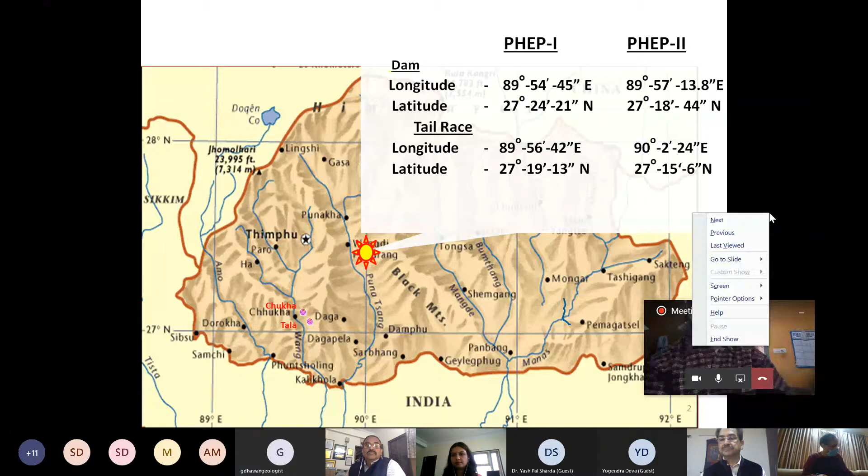So the title of the presentation is Punatsangchhu-I.

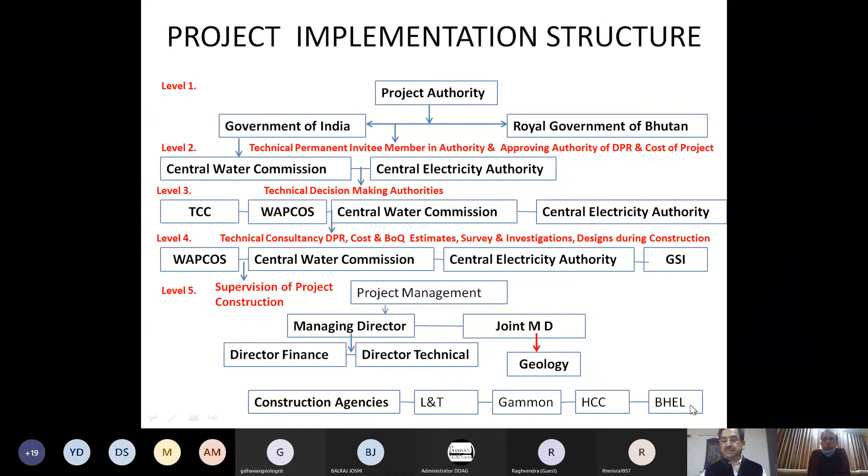The geology wing of the project used to be governed by the joint managing director, whereas the managing director had director of finance and director technical, who used to hail from Government of India, serving officers from Government of India. The technical works got carried out through various very efficient and renowned teams of constructing agencies, like L&T is given the work of dam, Gammon making HRT, HCC is making powerhouse, and BHEL is overall supplier of and installations for the machinery of hydromechanical and hydroelectrical works.

Now let us go through the history of the project. The original dam location for the Punatsangchhu-I dam was at 1.5 kilometer downstream of the present dam site. The location of the dam axis was shifted in 2008 by 1.5 kilometer upstream, with an understanding that the dam foundation grade will be available under the riverbed at a depth of around 45 meter, as compared to what it was expected at 78 meter depth at its original location. So it was a great advantage being seen, and it was understood that with this gain in lesser depth of the excavation for the foundations, the dam axis should be shifted 1.5 kilometer upstream.

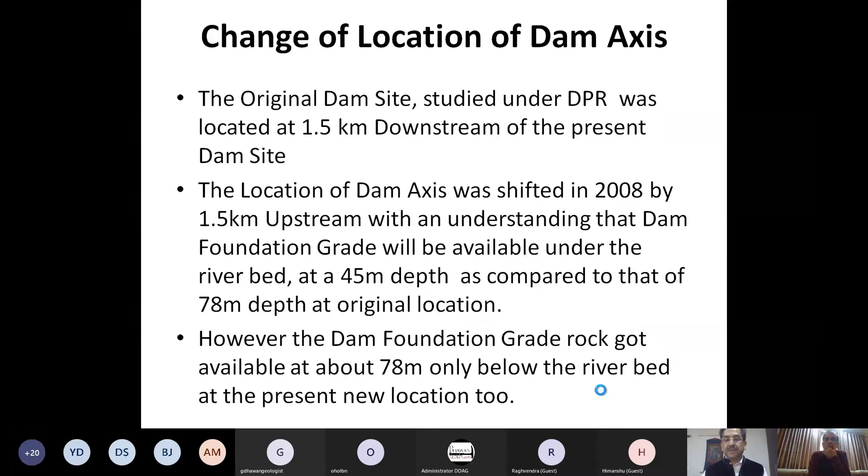However, later, during the construction of the project, and a little earlier also, when tenders were being drawn, it was seen that the dam foundation grade rock still existed at around 78 meter below the riverbed. So that advantage was not there as was seen. However, it was seen that there will be an advantage of at least gaining the head for generation of power, and by that some 105 megawatt extra could be generated at a very little cost added to the project. Therefore, it was decided by the authority, with input from all the consultants, that the dam axis can be shifted 1.5 kilometer upstream.

Then if we see the Google map on which I have tried to transfer the project salient features, this is river Punatsangchhu with a light blue or white color, and the red color is a primary national highway which runs parallel to the river. The river has its left hillside, which comprises of a very good geology, and it has its right bank, which is relatively very weak geology.

Dam is located here, and HRT goes within the left hill because it is a very good geological formation, and the powerhouse is there. There is around 300 meters, or 290-meter, drop of the pressure shafts, and power is generated, and the water is let through the tail race tunnel to join back in the river.

Punatsangchhu-I and Punatsangchhu-II. Punatsangchhu-II is around 13 kilometers downstream from this point, and it has totally a mirror image of this project, but with the only difference that the hillside on the left bank here is of very good geology. Therefore, all the underground structures are housed within the left bank. Whereas when the river reaches Punatsangchhu-II, the situation just gets opposite, and the right bank hill there has a very good geology, and left bank geology becomes very poor. Therefore, all these underground structures are housed in the right bank there in Punatsangchhu-II.

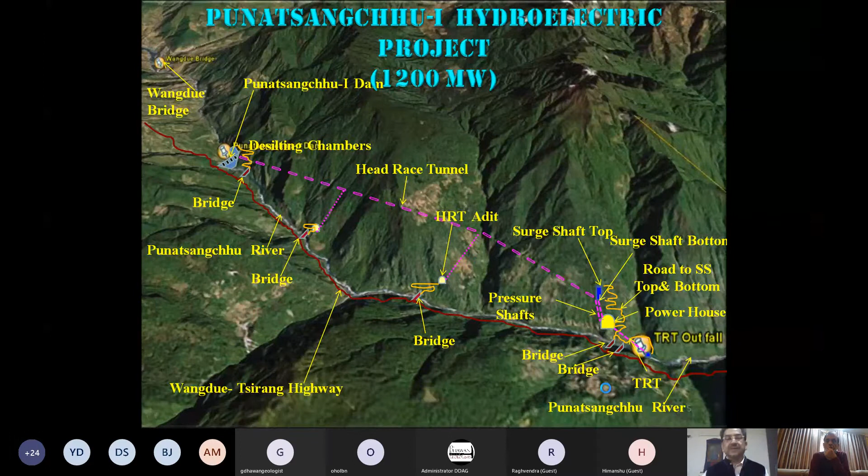So let us concentrate on Punatsangchhu-I, which has a very good geology in left bank. Therefore, all underground structures are there in the left bank, and right bank has poorer geology. The type of the dam conceived was concrete, which later on was considered to be made RCC, roller compacted concrete gravity dam, for some reason which I'll explain later.

The top of the dam is at 1205 meter elevation, FRL being 1202. Length of the dam top is 239, and maximum height of the dam is 136 meter from the foundations. The dam's present level of excavation has reached 1110 meter, and the deepest elevation for the dam section is 1069 meter. Therefore, for the deepest section, around 41 meter excavation was yet to go.

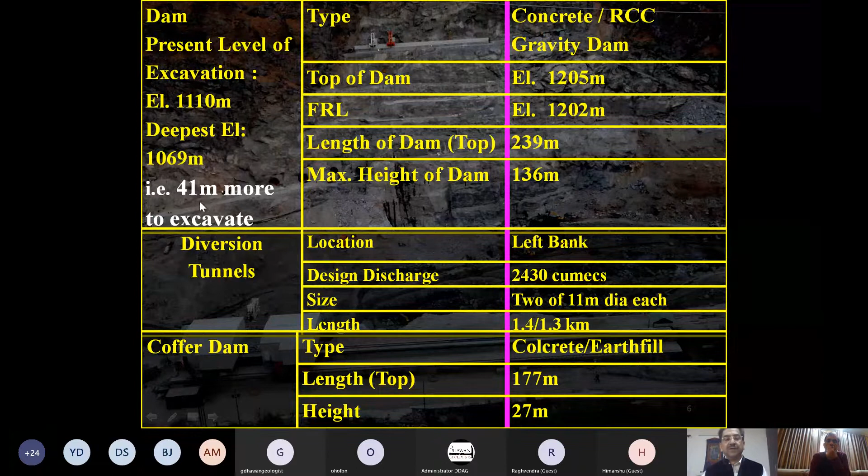This is the dam pit view from the downstream. This is right bank, and this is left bank. If we see the left bank, as I said, it was a very good geology. It has its rock almost vertical face, and very good looking, very sturdy. Whereas the right bank is very flat as compared to left bank. And later on in further slides, we'll see that the geology here is not very good, as could be apparently seen also. This is the National Primary Highway.

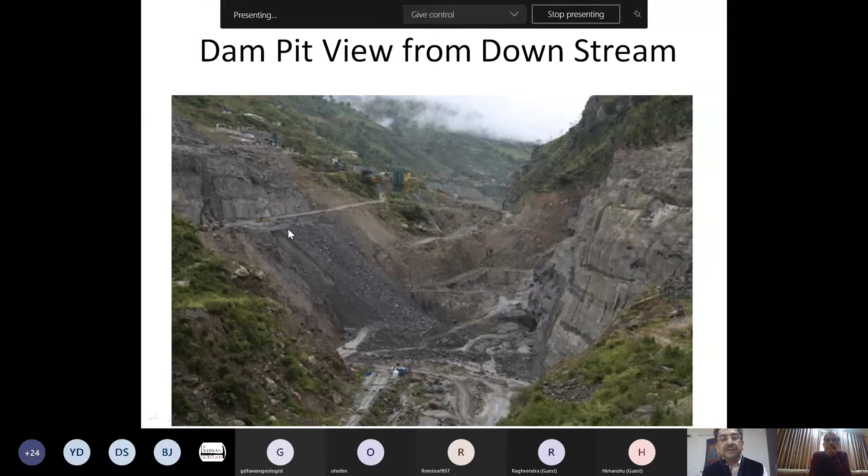This is the left bank, and we can see there is excellent subvertical rock face encountered in the left bank. We had some vertical joints persisting in this face. Therefore, you will see a lot of cable anchors periodically given at various benches, designed to be 30 meters in length each, and of capacity 30 tons each.

These are intake structures, intake tunnels ready to be further given an intake structure rising from here. The intake structure started here, and by now it has come up very well. This photograph, being old, is meant only to show the geological setup of the left bank. This is the dam axis I have marked on the left bank, and the dam imprint can be seen here.

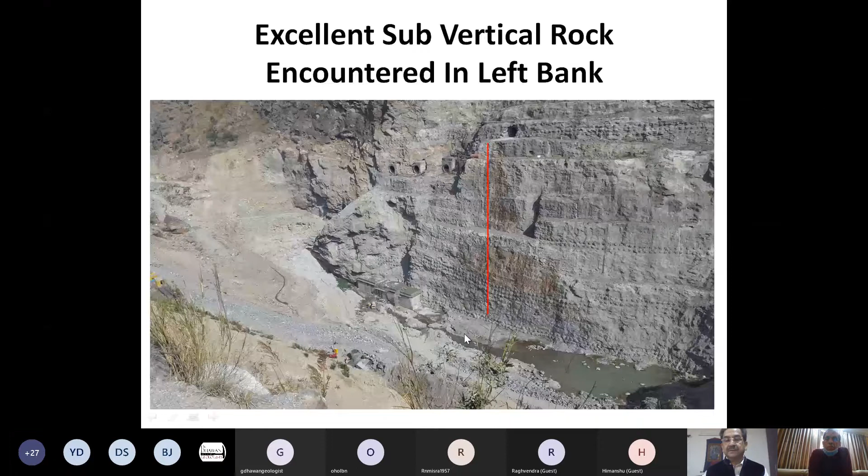This is the right bank, which is relatively very flat as compared to the left bank, and geology can be appreciated in this picture. The highway is here. This is the top of the dam to be here. This is 1205 meters, and this is around 1220 meters, which later on sank and became 1216 meters or so. These are the cable car benches from where the cable cars are suspended for concreting of the dam.

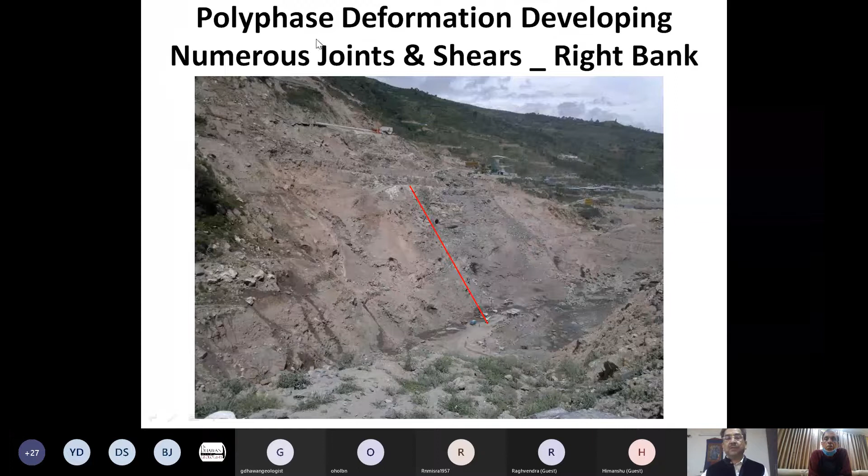The right bank can be seen, and it is comprising polyphase deformation which has developed numerous joints and shears in the right bank.

There is a strange coincidence which happened in the two mega hydroelectric projects, Punatsangchhu-I and Punatsangchhu-II, which are under construction since 2009-10 in Bhutan.

The coincidence is that in Punatsangchhu-I, the right bank at the dam site has failed, moving and sinking the hill mass by 5 meters over a stretch of 400 meters in height and around 250 meters in length. Whereas in Punatsangchhu-II, there was a huge rockfall in the downstream surge cavern, resulting in a 91 meter high, 45 meter wide, and 70 meter long cavity being formed in the crown of the downstream surge gallery.

So, to appreciate things better, let us understand the timeline of making Punatsangchhu-I, marking some crucial events along the time. In 2008, the dam axis was shifted 1.5 kilometers upstream from the DPR studied dam axis location.

In 2009, the tender stage investigations were done with boreholes and a drift done in the right bank, and tender stage designs and drawings were prepared. Also in 2009, the work was awarded, with L&T for the dam, HRT by Gammon, and Powerhouse by SCC. It also happened that in 2009, around April, there was a big storm, Aila, affecting the Bay of Bengal, which also affected Bhutan.

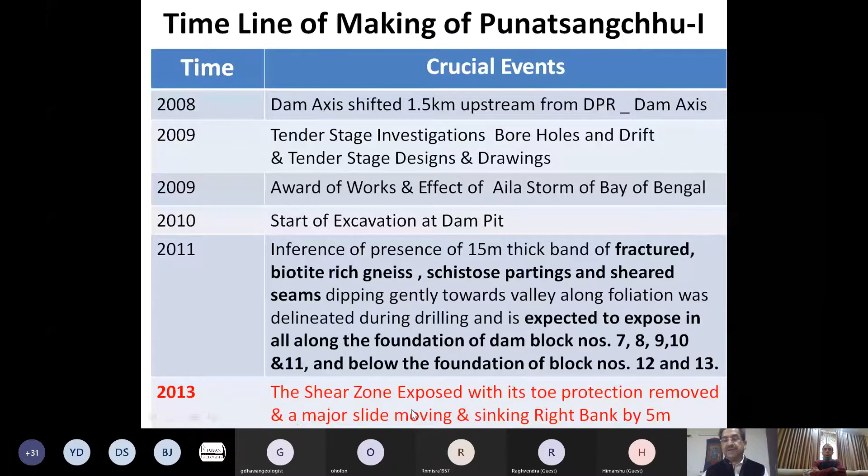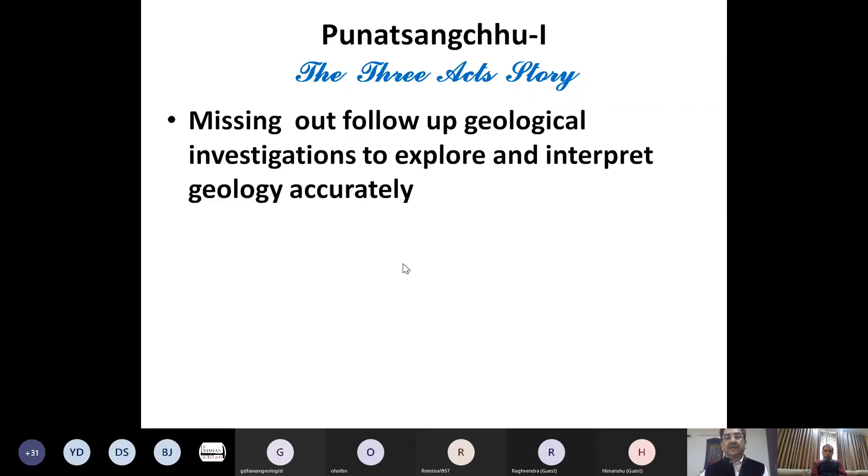I like to put the Punatsangchhu-I history in 3 acts of its story. First is about missing out follow-up geological investigations to explore and interpret geology accurately. In 2009, at the tender stage, various geological explorations were done and some geological inferences were drawn. Later on in 2011, when it was seen that a 15-meter thick band of fractured rock and shear seams are present there, therefore some follow-up investigations were required, which seems to be missing. As a consequence, because the shear zone could not be interpreted, the designs for the support of the excavated slopes also could not be revised, and therefore this also may be a missing out.

The corrections to be made to the designs was there. And as a third act, it resulted into the catastrophic impact during the excavation of Punatsangchhu Dam, in which the right bank had moved in a stretch of 400 meters in height and around 250 meters in length along the bank, which moved by 5 meters vertical, 5 meters towards the river, and around 2.5 meters along the river.

If we concentrate on the geology in the right bank, it consists of gentle natural slopes on the right bank of river and they are controlled by low and valley-ward dipping foliation planes. These prominent joints are closely spaced and are frequent and open at places and form potential wedges due to their intersection.

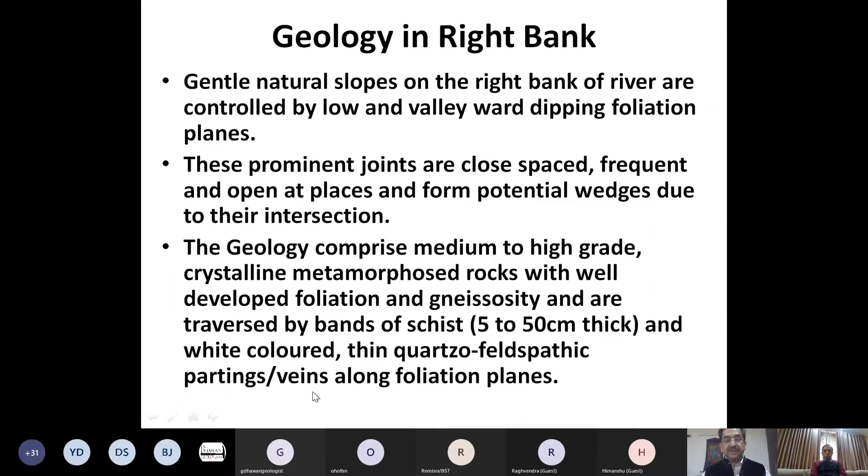The geology comprises medium to high-grade crystalline metamorphosed rocks with well-developed foliation and gneissosity, and are traversed by bands of schist which are 5 to 50 centimeter thick and are white-colored thin quartzo-feldspathic partings veins along the foliation planes. The strata shows small-scale S-shaped tight folds and broad warping of the beds at places, indicating that rock...

...strata has undergone polyphase deformation in the past, leading to the development of numerous crisscross structural discontinuities like joints, shears, etc. of different orders.

Five prominent and two random joint sets are recorded in the right bank. The foliation is very close to moderately spaced, from 2 cm to 60 cm, and dips towards the valley slightly in downstream direction. However, rolling of dip is also observed at places.

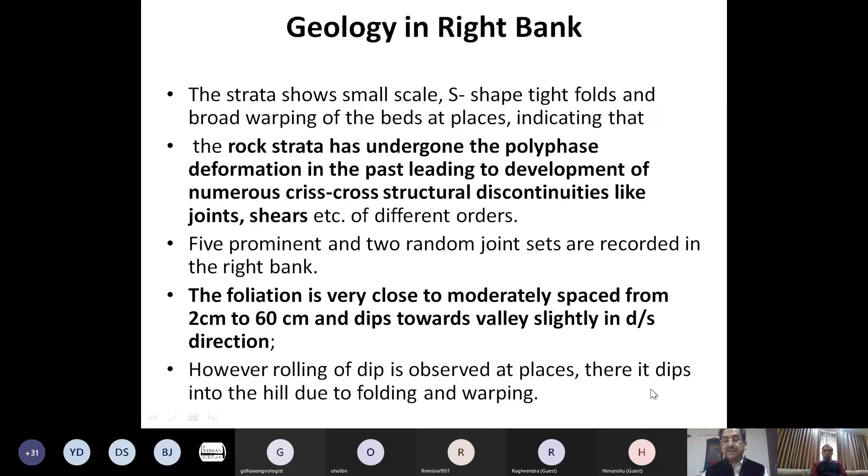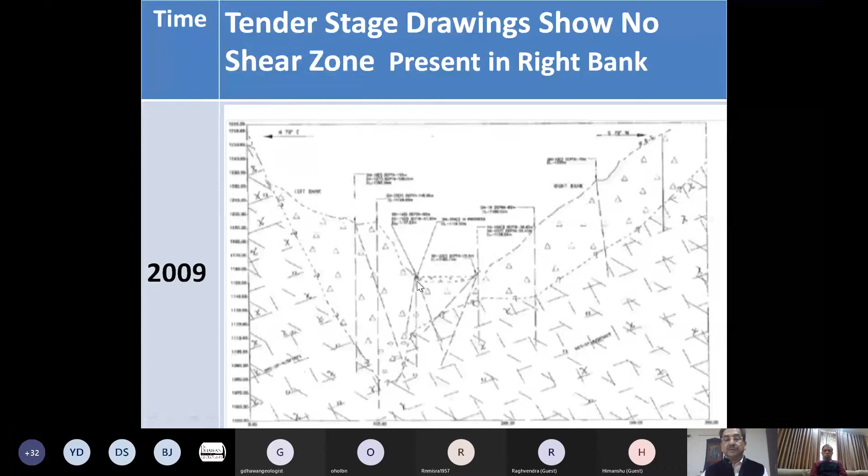There it dips into the hill due to folding and warping. In 2009, in the tender stage investigations, these geological drawings prepared do not show any presence of shear zone in the right bank.

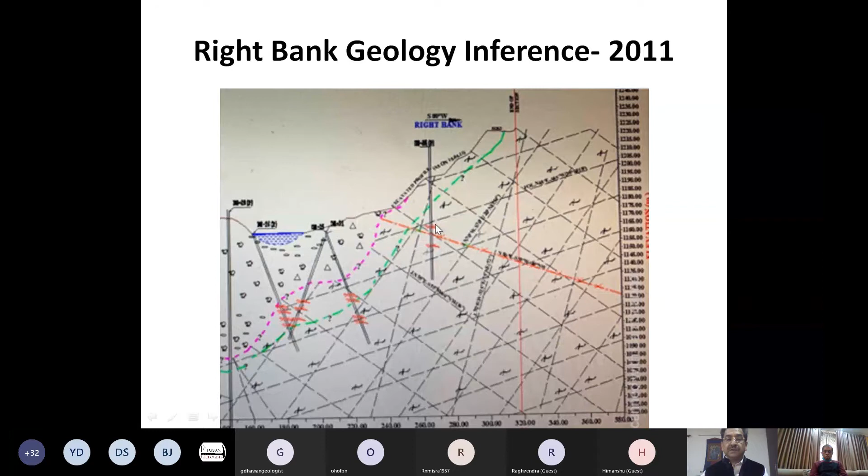Whereas later on, from the same geological investigations and borehole logs, in 2011, the project geologist had interpreted that there are shear seams present, and there is a band of around 15-meter thick band of fractured rock mass and shear seams present there.

This was perhaps the time when more explorations should have been there.

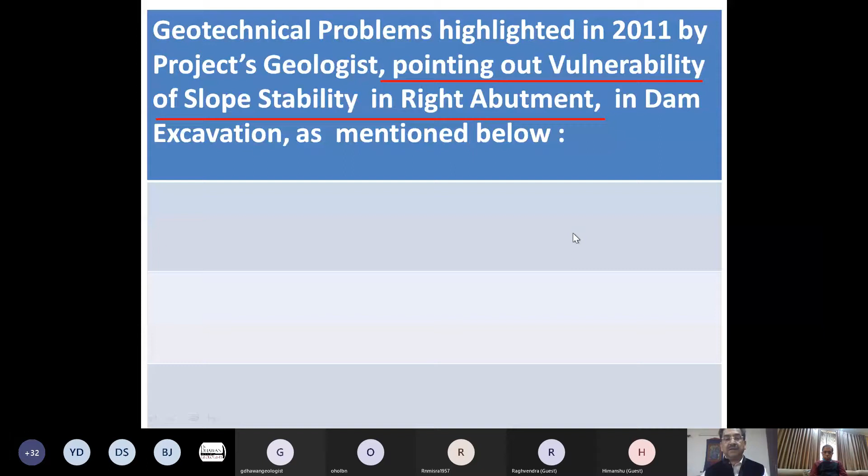In 2011, the geotechnical problems highlighted by the project geologist in the right abutment were mentioned as presence of thick shear/fracture zones, biotite-rich bands of gneiss, schist, with having very low strength and fissile and fractured, and have a very less RQD. They are moderately jointed and have a very blocky nature of the rock mass with steep joints having longer continuity and persistence striking along the flow direction.

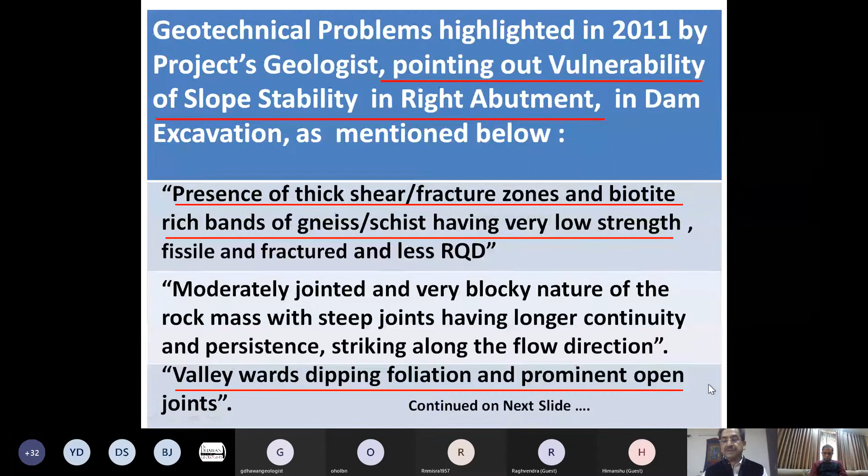Valley-wards dipping of foliation and prominent open joints. These are some highlights of the right bank's geology.

Now here, genesis of the problem had been identified, and going by the geological conditions, warning was given by the project geologist in 2011, which stated that a 15-meter thick band of fractured biotite-rich gneiss with schistose partings and...

...sheared seams, which dips gently towards the valley along foliation, was delineated during drilling, and it is expected to expose all along the foundations of dam blocks 7, 8, 9, 10, 11 and below the foundation of blocks number 12 and 13. The core recovery and RQD in the rock mass is very poor.

This is what he had interpreted. Such bands striking parallel to the flow and dipping towards valley are prone to slide under forces, hence require proper treatment during excavation.

These are the important advices that the geologist gave, that because of such bands striking parallel to the flow and dipping towards the valley, they are prone to slide and require proper treatment during excavation.

If we try to put this interpretation on the section of the dam location, these are blocks starting from 1 on the left side and going to 13 on the right side.

And if we see, he said there is a 15-meter thick band which will go around under blocks 7, 8, 9, 10, 11, 12, 13. That means this is 7. So here, something he had interpreted of a 15-meter thick band, which may be visualized like this.

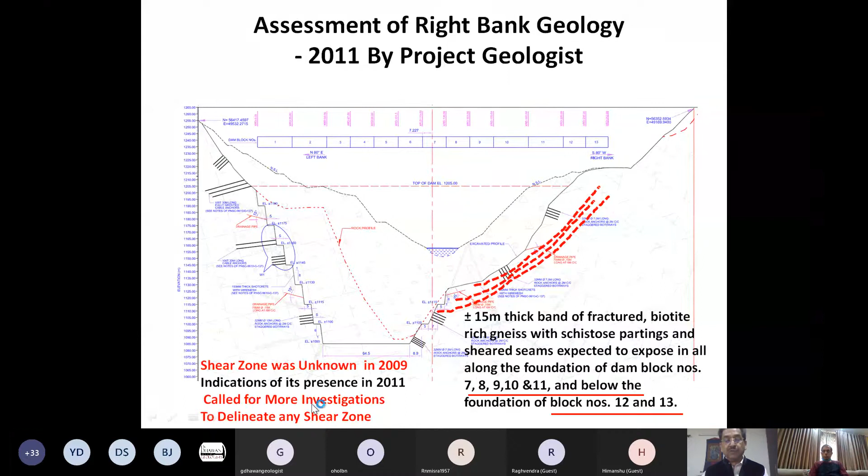This is only a visualization, but somehow the shear zone was not known, which was unknown in 2009. There have been indications of its presence given in 2011 by the project geologist. So it may have called for more investigations to delineate any shear zone if it was present.

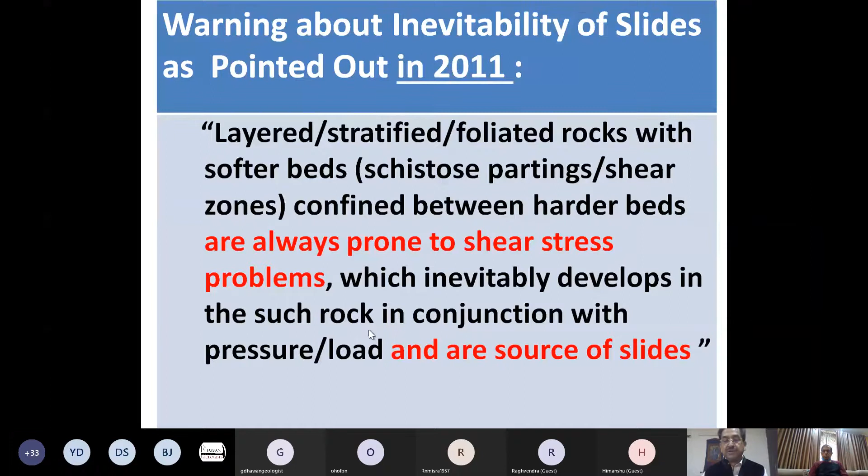Inevitability of slides had been warned in 2011, stating that layered stratified foliated rocks with softer beds, schistose partings, shear zones confined between harder beds are always prone to shear stress problems, which are inevitably developing such rock in conjunction with pressure loads and are a source of slides.

Now let us see how the excavation had proceeded in the right bank. I am concentrating only on the right bank because the problem had occurred in the right bank.

There was a national primary highway here, present with this much width shown by the red line, which was thought to be increased in width because later on most of the project vehicles would be running around this. So the width of the highway was increased and some excavation was done here in February 2010.

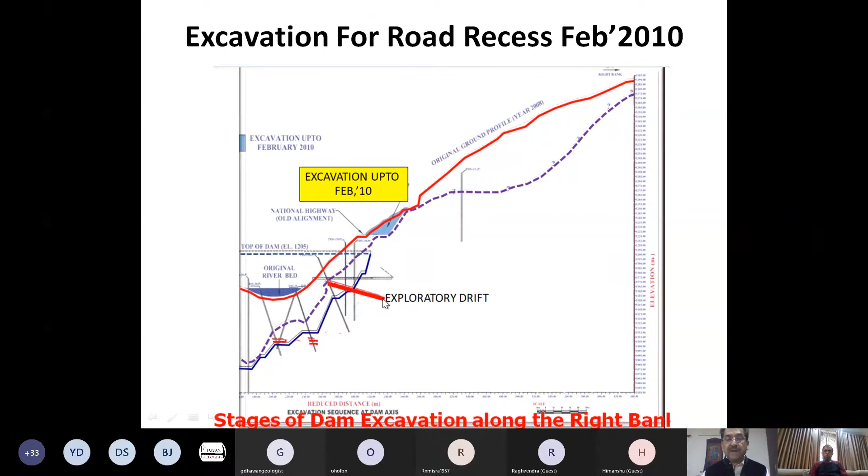This is the natural rock ground profile before any excavation, and this was the expected rock line interpreted by the geological studies. A drift was made here, around 90 meters long, and at the end of this drift there had been a collapse at that time, so the work had stopped from putting it further.

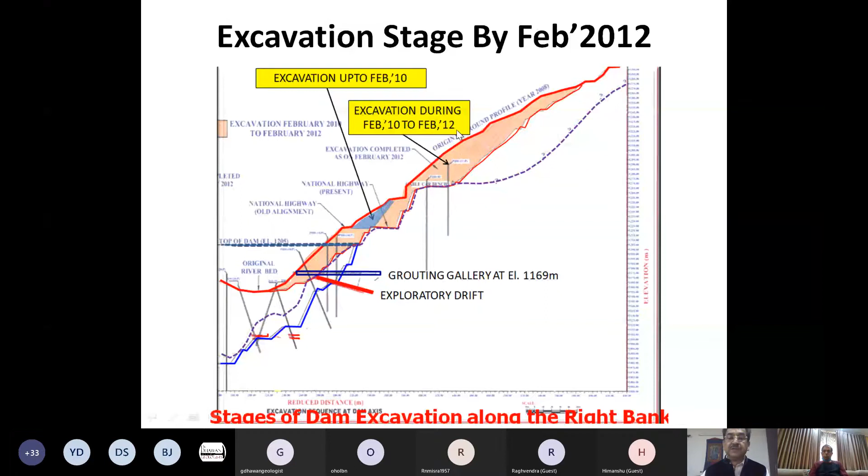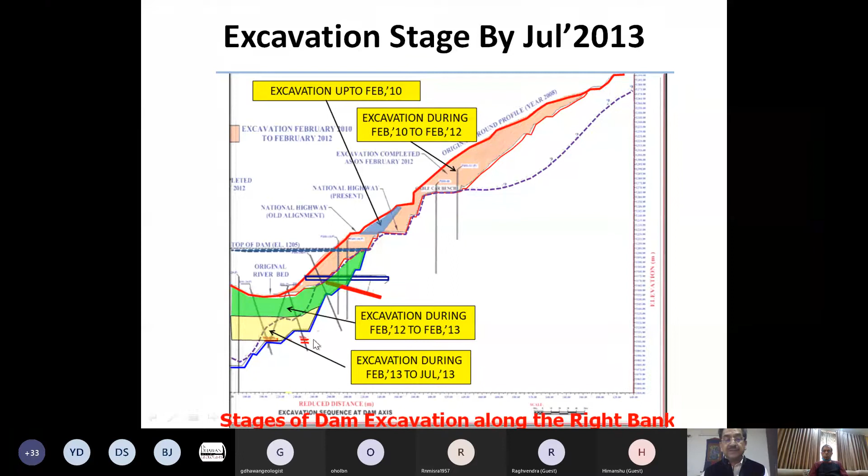Proceeding with further excavation from February 2010 to February 2012, this part of the excavation was done, and from February 2012 to February 2013 further excavation progressed and deepened. From February 2013 to July 2013, this part of the riverbed was excavated, whereby these shear zones got exposed, and the toe which was holding these shear zones got removed because of this excavation. Toe protection of the shear zone was removed in July 2013 and the problem occurred.

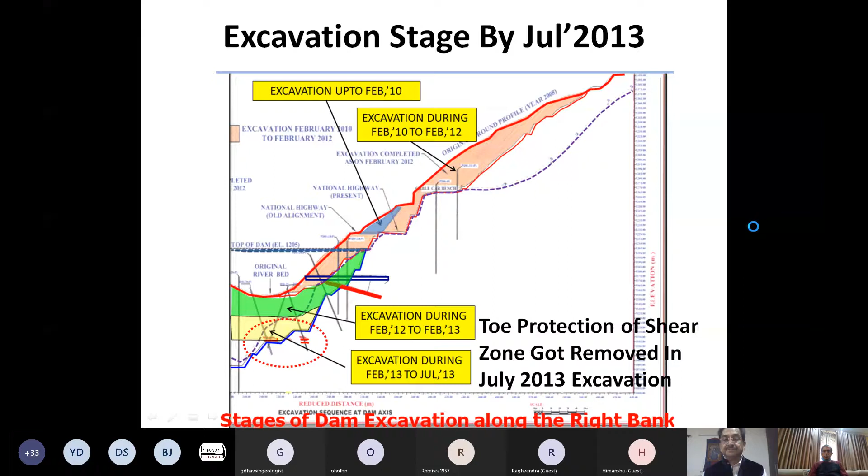It needs to be highlighted that the left bank had been given 30-meter long cable anchors, as I told, to protect it from toppling against vertical joints. Whereas because the right bank was very flat, it was not envisaged that it would require any cable anchors, and these were provided with only 7.5-meter long rock anchors, which were not penetrating long enough to reach sound rock here and protect against any slides potential along this 15-meter thick band.

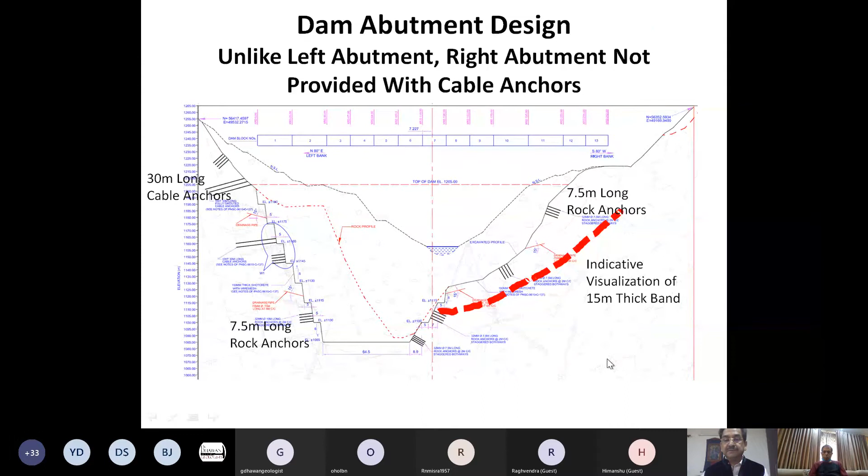So we see that the support system provided for the excavated right bank slope dam pit comprised only 7.5-meter long rock anchors, and was perhaps not sufficient for holding rock mass from sliding over the underlying shear zone. This is the delineated shear zone. I'll come to let you know how it got delineated.

Unless very long cable anchors were provided, these 7.5-meter long rock anchors are understood to be not quite safe enough to prevent any slides on the vulnerable rock mass. This is the vulnerable rock mass, which may have a tendency of sliding on this plane.

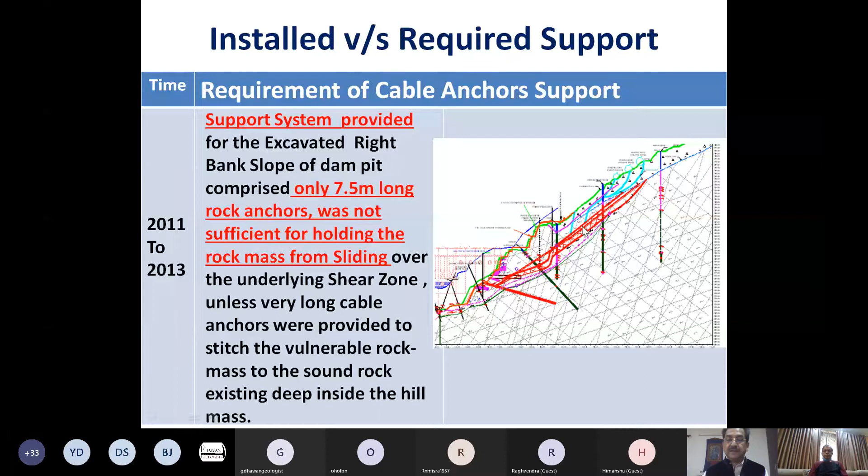Eventually in July 2013, within a week, this entire hill mass, around 400 meters in height, along the river in a length of around 250 meters, this whole hill mass bodily moved 5 meters vertically down. This highway, which was here, came down by 5 meters to this green line, and the whole right bank got shifted by 5 meters towards the river.

This shifting is by 5 meters towards the river. The red line is the earlier profile, the green one is the ground profile after the movement. So it moved 5 meters towards the river, sank 5 meters vertically, and moved along the river by 2.5 meters. All these movements were recorded by inclinometers also. The hill mass in this reach, 400 meters height, 250 meters length, moved 5 meters towards the valley, 2.5 meters towards the downstream side, and settled by 5 meters.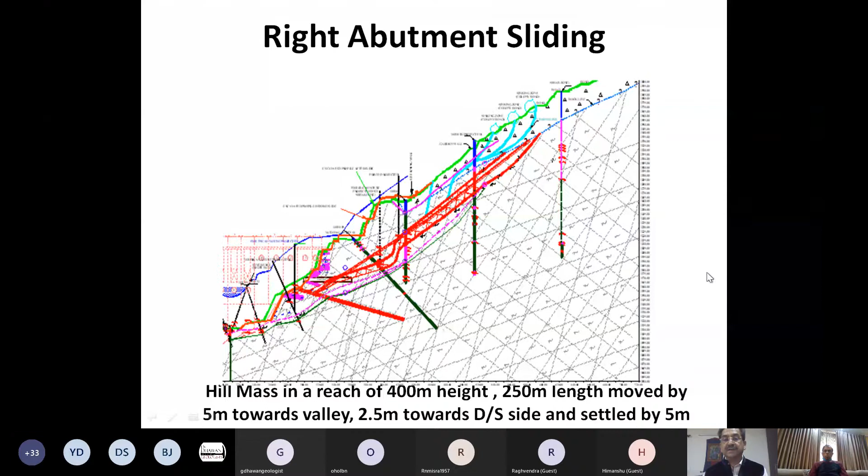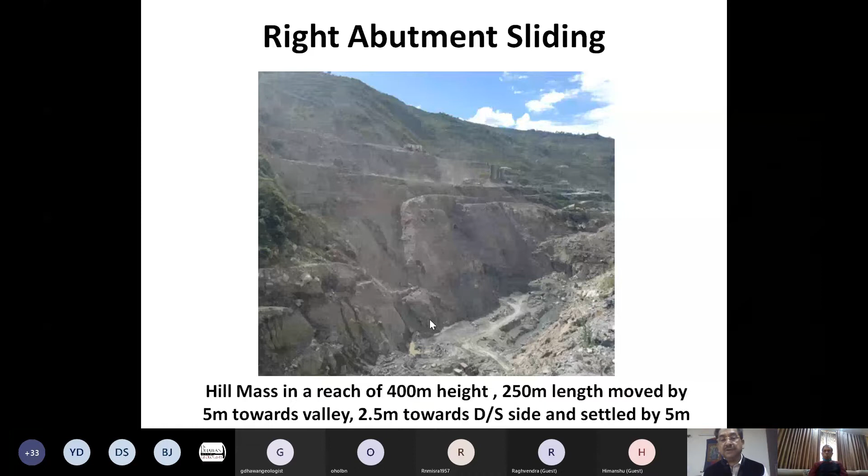Just to appreciate, these are the pictures. This entire hill mass, right from top to bottom, had shifted by 5 meters. This is a view seen from the downstream, showing the hill mass which got affected.

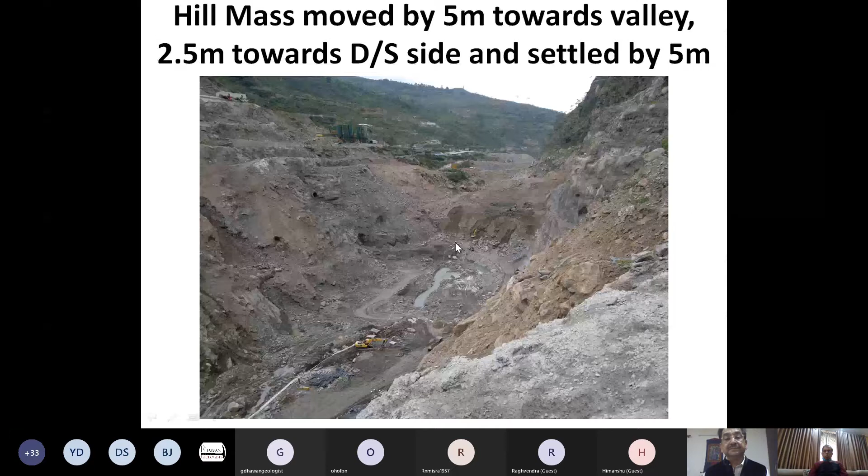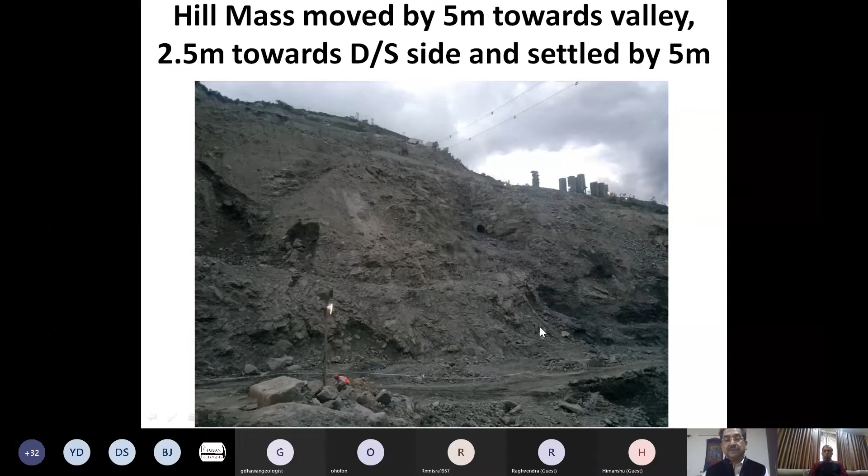This is a closer view, and the effect of the movement can be seen, how the geology got changed. Foliation and gneissosity traversed by bands of schist is visible here in these close-up views.

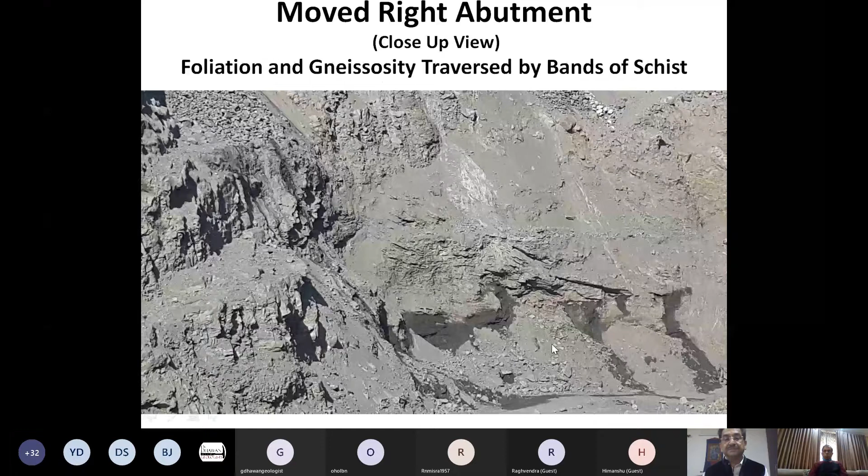The cable cars, which were earlier hanging here clear of any restriction, got sunk by 5 meters and were touching this hillside. They were rendered useless.

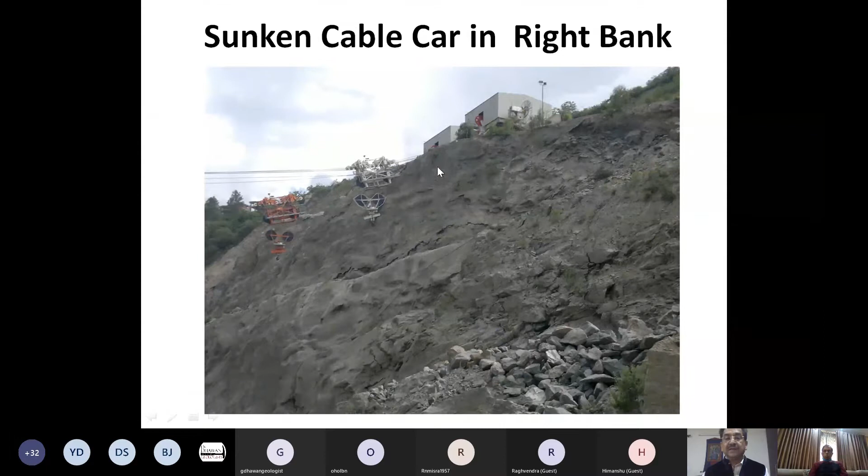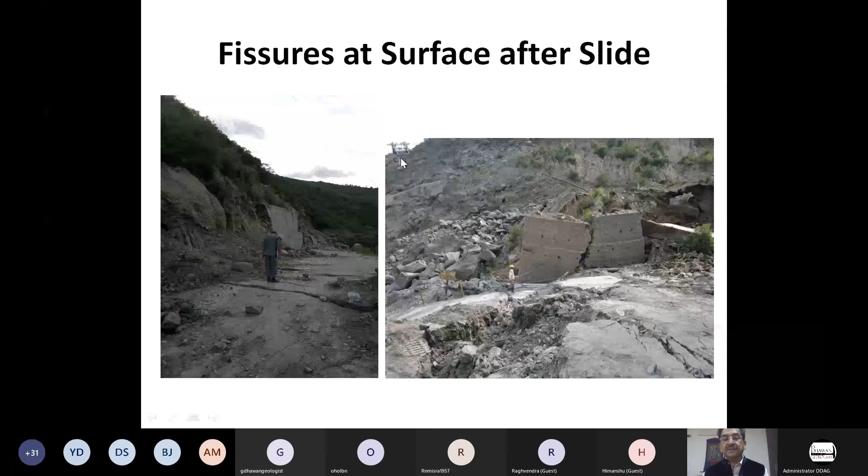This is a closer view of the slumped mass. Fissures of 10 to 15 meter depth were seen at higher elevations where separation of the ground was visible. There was damage to the structures. The cable car is seen again here, along with these fissures and openings of the ground.

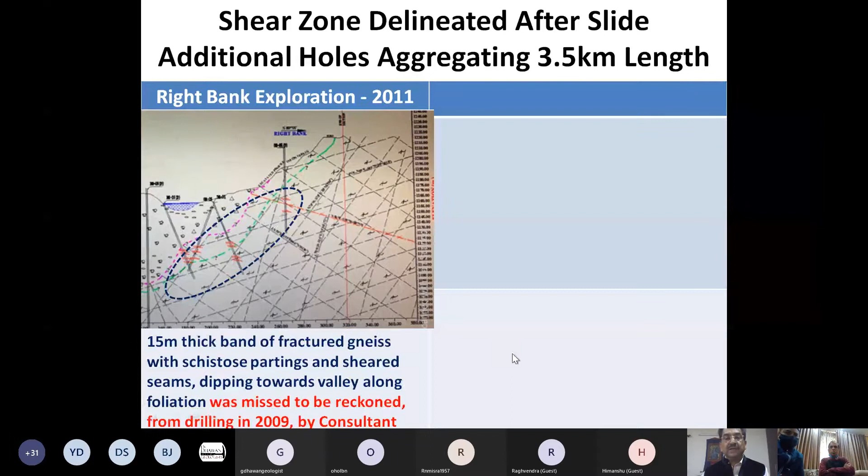In 2011, the geologist had mentioned that there is a 15-meter thick band, and in 2013, explorations were done after the slide through around 3.5 kilometers of aggregate length of additional boreholes, perhaps 23 in number. Together they made 3.5 kilometers of borehole length, and this shear plane was delineated through this exploration. It was termed a major shear deformed zone of clay gouge, 30 to 200 centimeters thick.

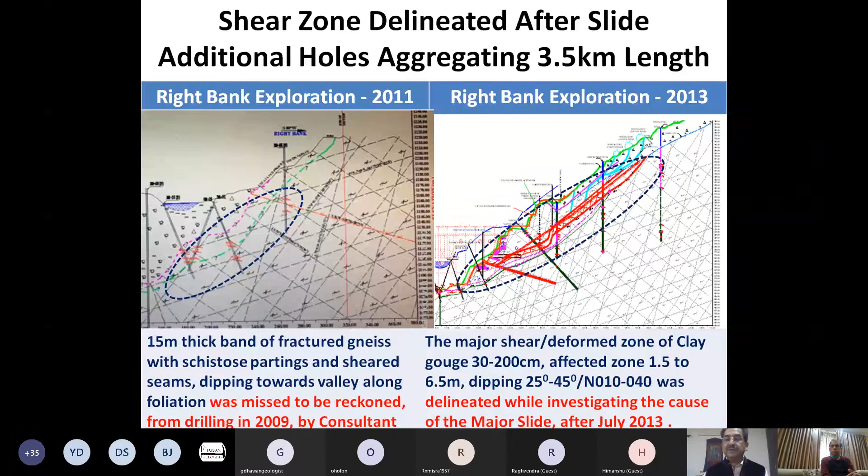This zone has an affected area of 1.5 to 6.5 meters thick, dipping 25 to 45 degrees towards north 010 to 040, and it was apprehended that the cause of the slide was this shear zone on which the ground had slid. These cracks, which I had shown in those pictures, were seen here with 10 to 15 meter openings.

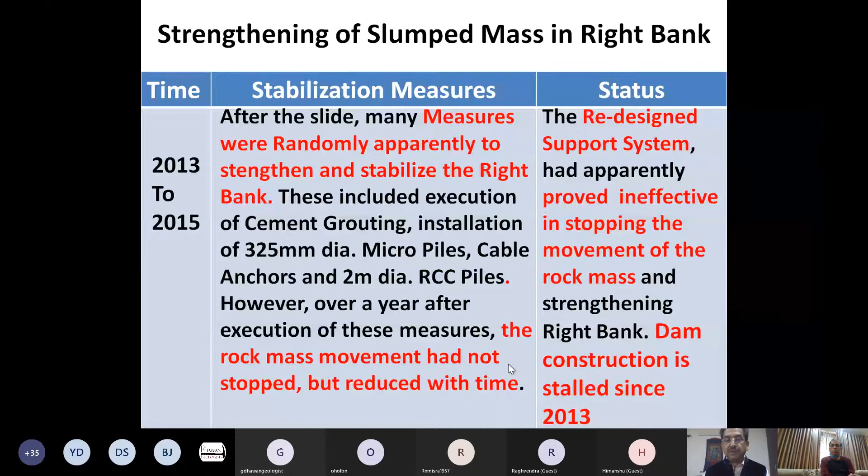Okay, sir. Now, thereafter, a lot of measures were taken. 325 millimeter diameter installation of micropiles was done. Cement grouting was extensively done through the slump mass. Cable anchors were provided, and 2 meter diameter RCC piles were provided. But all these did not prevent the rock mass movement, although it had slowed down very much, it continued for a long period, maybe around a year. The 2 meter diameter holes were cut through the slump mass, and reinforcement was provided.

The consolidation grouting had 8.36 lakh cement bags, and 1,050 numbers of 325 millimeter diameter micropiles were provided. 1,000 numbers of 100 metric ton cable anchors were provided of 100 metric ton capacity each, and 250 numbers of 2 meter diameter RCC piles were driven to stabilize the right bank.

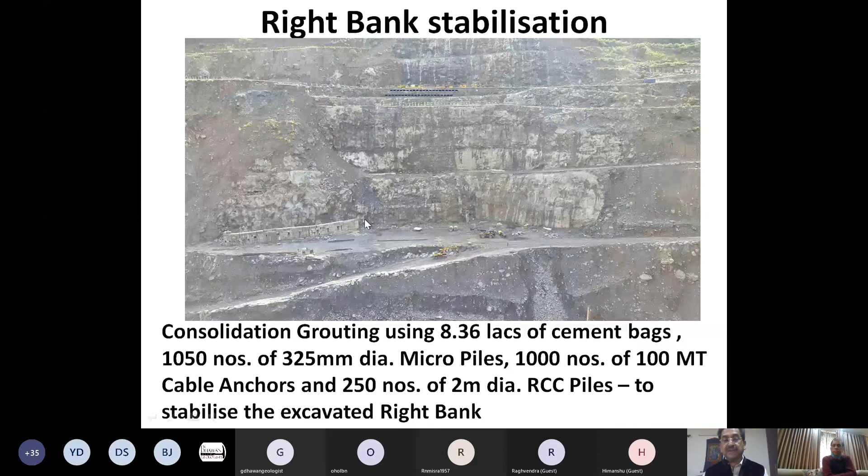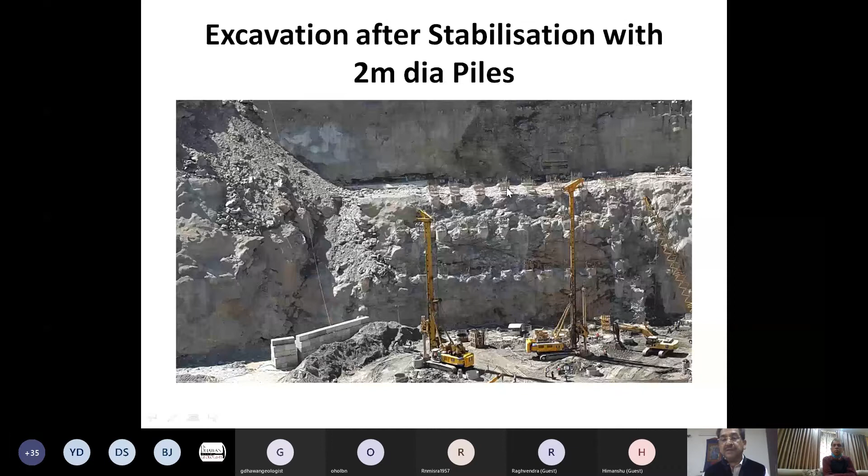Later on, the excavation was to proceed, and final limits of excavation were required. Then these 2 meter diameter piles had to be shaved off, and therefore some part shows the reinforcement and concrete removed, which will later be cut, and a profile of the slope would be maintained.

The resulting financial implication has been that the original sanctioned cost of 3,514 crore for the project would now have a probable completion cost of around 12,000 crore. The project has reached a stage where all pertinent works except the dam are completed. Construction of the dam is stalled since 2013.

After rupees 8,000 crores have been spent, the completion of the project is uncertain.

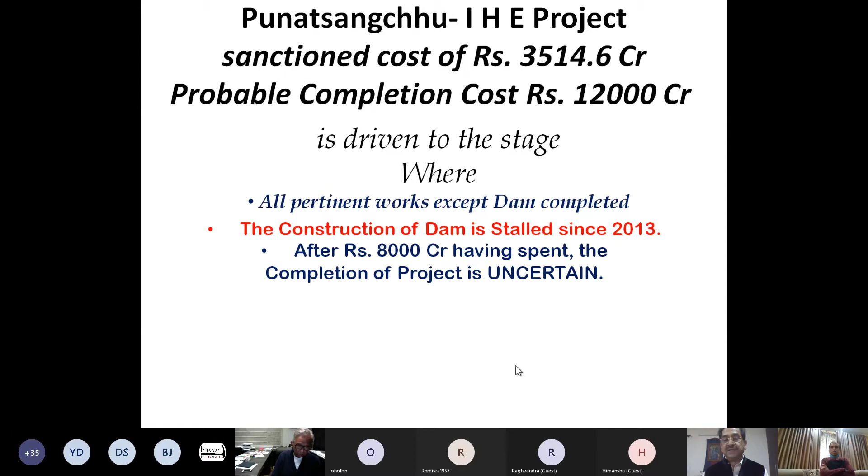Additionally, there is an annual loss on account of unrealized interest on the capital cost invested, estimated to be around 800 crores per year, recurring every year for the past 5 years. It is now recurring, and when the project has come to a stop, it will continue recurring year after year.

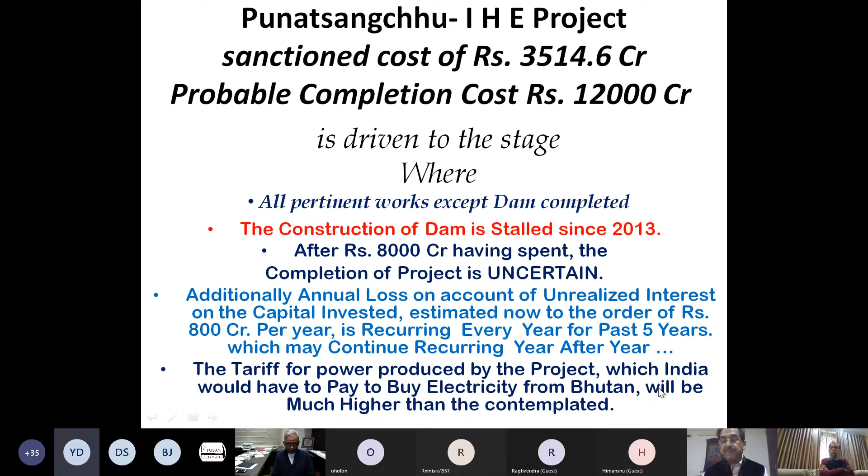Additionally, when the project gets completed, the tariff for power which India would have to pay to buy back its electricity from Bhutan would be at a much costlier rate than what was contemplated earlier.

What needs to be learned is that construction of dam designs, etc., should adopt a stage-wise iterative approach, which is crucial for dam construction. This stage-wise and iterative approach comprises adequate and followed-up geological investigations, correct geological inferences, and proper and reviewed designs based on those geological inferences.

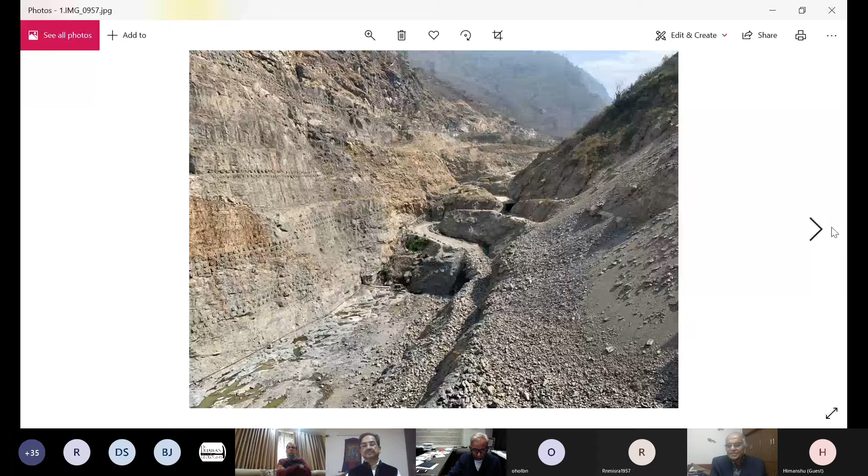This is the left abutment. You can see the intake structure. If you compare it from the old pictures, the structure has been brought up, and the rock treatment and other things Sharma Sahab already showed you.

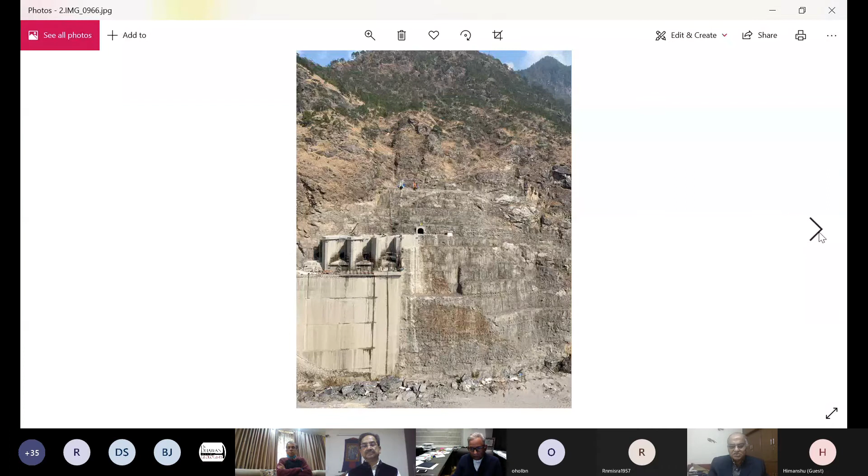This is the overall view of the right abutment. You can see the dam axis is somewhere here. You can see this wall kind of thing, which is these 2 meter diameter piles. The dam axis is somewhere here, and this is the national highway.

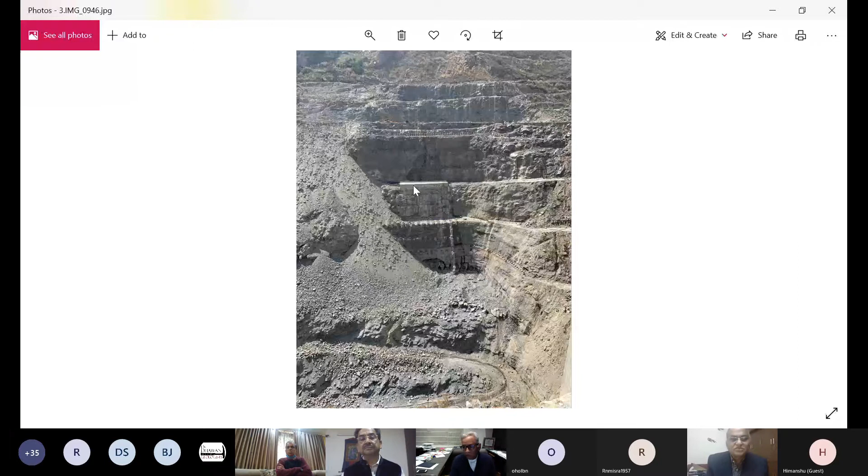You can see this mass on the downstream side. I will show you another picture where you get the full picture. This is another slide because the whole area from here to here had been stabilized with micropiles and big 2 meter diameter piles.

After that, with the crown at the highway level, this slide took place, and the mass which moved was still hanging at this place in March 2019. So this is the dam abutment, with the dam axis somewhere here, and this is the downstream mass.

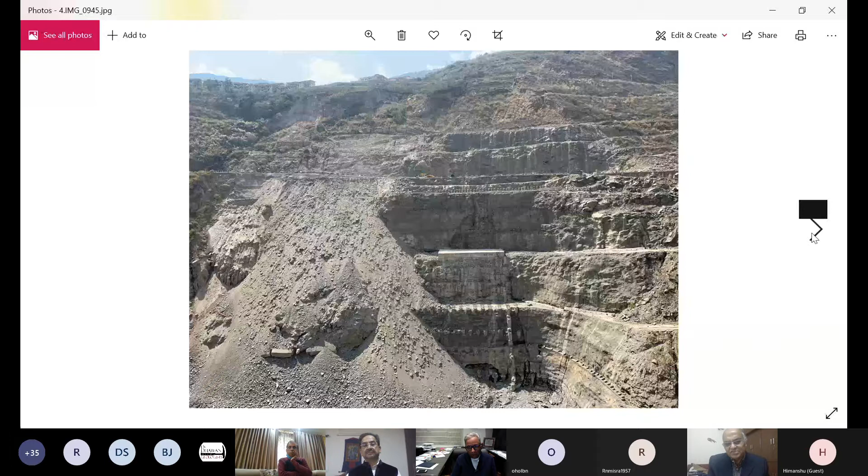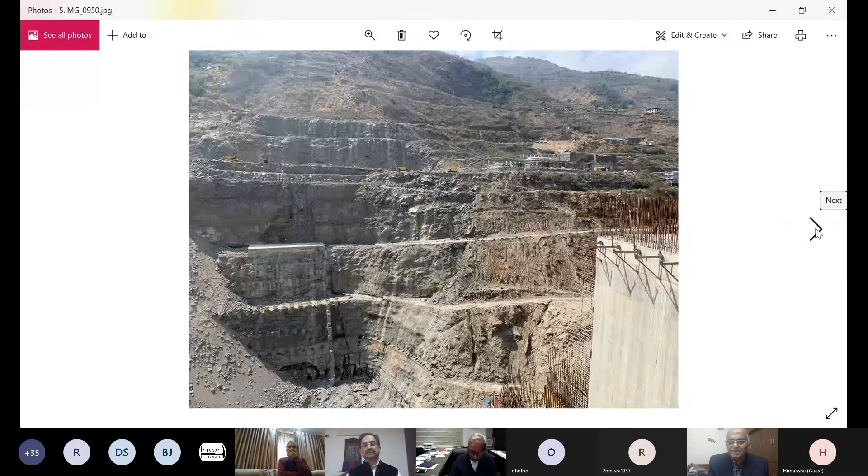If you see another picture of the upstream side, you can see it is much better. This is the continuity of this rock above, which comes up here. I will not make any other comment, I will just show you the fresh, latest pictures so you can get an idea.

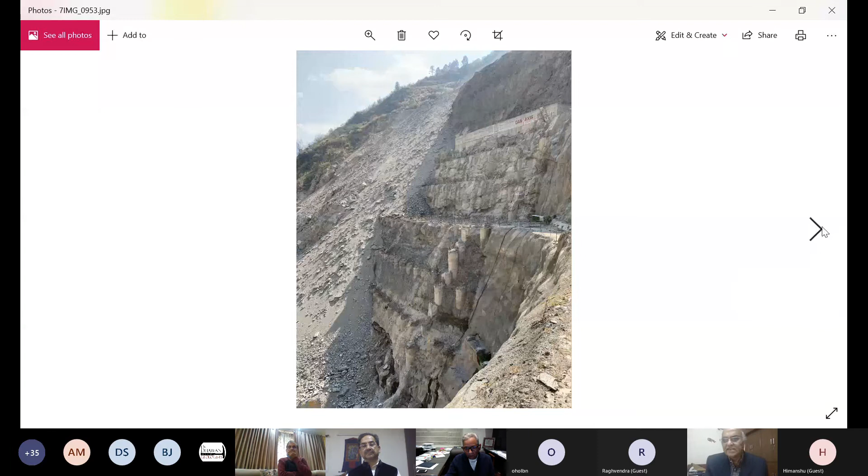This is another view of the same thing, and this is the slanting view of the pile work for stabilization. After piling, the face has been cut along these piles, and the downstream slide is again seen here. Finally, this is me standing at one of the 2 meter diameter piles. Just see the colossal size of this pile, and the dam axis can be seen up here.

So thank you very much. If you want to see this photograph again, you can ask me, I can do it again.

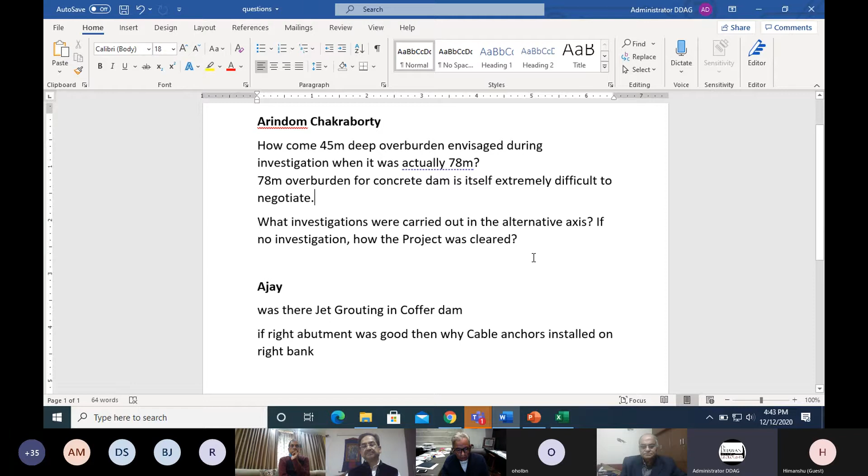The jet grouting was not done. Instead, a positive plastic concrete cut-off wall was provided, because it required negotiating a depth of around 100 meters of overburden for seating the cut-off wall with its socket into sound rock. Going for jet grouting of that depth, columns of around 100 meters, there would definitely have been windows left because of deviation of the grouting columns being driven. There is no method available to keep them vertical and sticking to each other so that no windows are left. Practically, there would be windows left and water seepage.

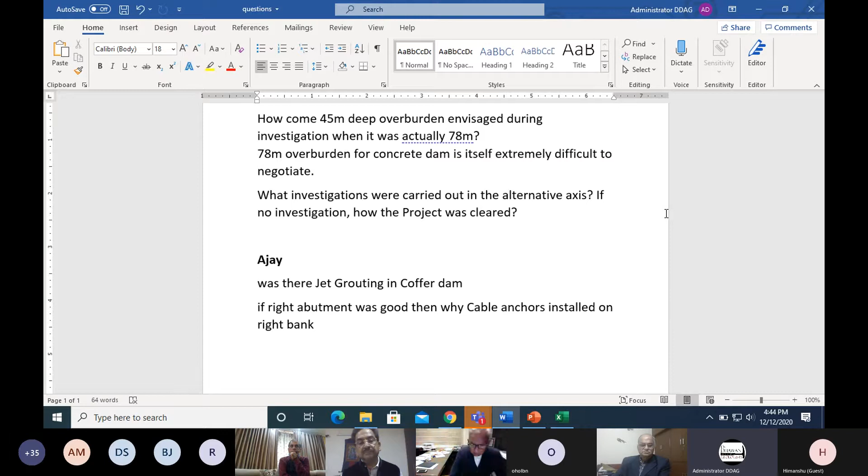Next question: if the right abutment was good, then why were cable anchors installed on the right bank? Actually, the right abutment was not good. It was later found that there is a 15-meter thick band of fractured rock mass, delineated post-slide, comprising a shear plane, a shear zone. Therefore, to stitch the weak slumped rock mass lying on the shear plane to the sound rock beneath it, around 1050 numbers of 100-meter long cable anchors were driven to hold back this slumped mass and stitch it to the sound rock. Initially, no cable anchors were designed, but after the slide, to strengthen the right bank, these cable anchors were designed and provided.

We have one more question in the chat box from Mr. Ahmed: were any stability checks done prior to the slide at the various stages of dam excavation to determine the support system? What factor of safety was adopted? Actually, the right people to answer this would be the consultants, since that was their responsibility. I was part of the project implementation team supervising construction, and had no role in knowing whether any stability analysis was being done. We simply carried out construction according to the drawings provided to supervising agencies like Punatsangchhu Management.

I think there should have been analysis done, at least after 2011, when the 15-meter thick band was delineated. There should have been extensive studies, as you mentioned, and measures and factor of safety should have been arrived at. Okay, thank you very much, Sharma sir.